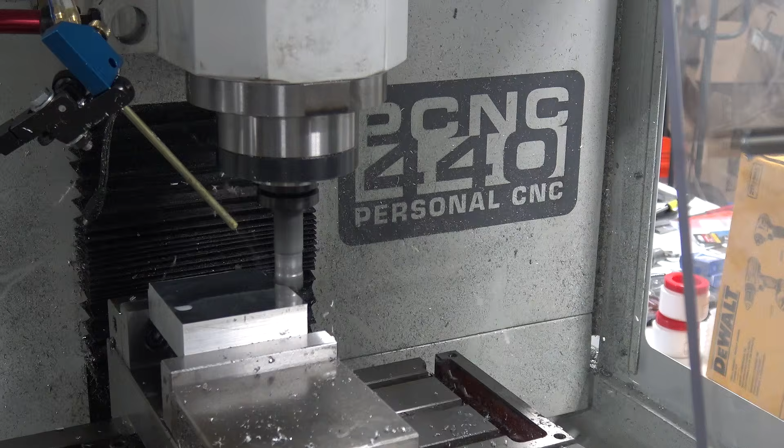Hi folks, Tormach 440, Fusion 360. Let's try machining a DIY injection mold. Welcome to another Wednesday widget. I'm super excited for this.

So Peyton over at X39 Brick Customs sent this over to us, and he said, do you think this is something we could make on a 440? I think he was trying to decide if that would be a good machine for him. And I don't really know, I mean, I'm inclined to say yes, but I've never made an injection mold like this, but it seems so cool.

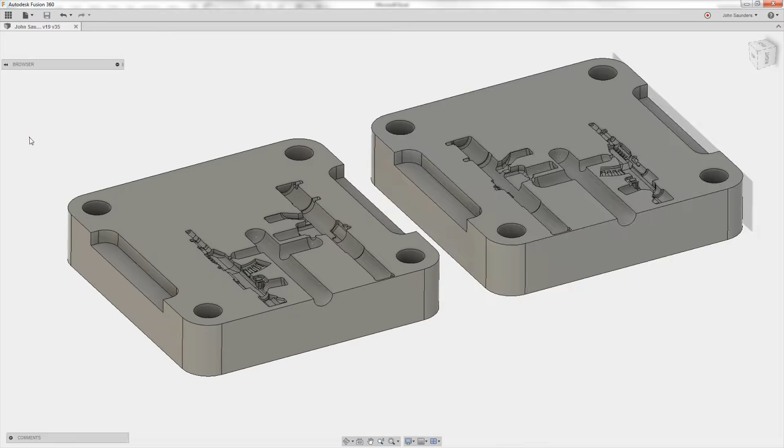So I'm going to hop back into CAM, and I broke the CAM up into a few different sections. The first is called roughing it. So that's where we're going to handle facing it off, the adaptive around it, because our stock is a little bit bigger than the OD of the mold. Contouring, this is basic stuff, drilling, and then we are going to rough out and pencil out the, I don't know mold terms, flow slots where the injection mold material gets pushed in.

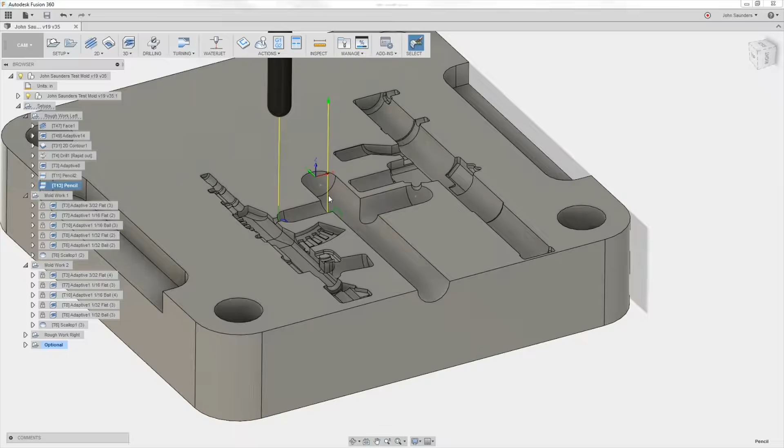So it'll actually get pushed in under pressure through here, and then the two little slots, one is right here and one is right here, are what allow the material to flow into the mold. But that's the quick and dirty stuff. Then we're going to focus on the left side. And again, I'm being pretty conservative, I think.

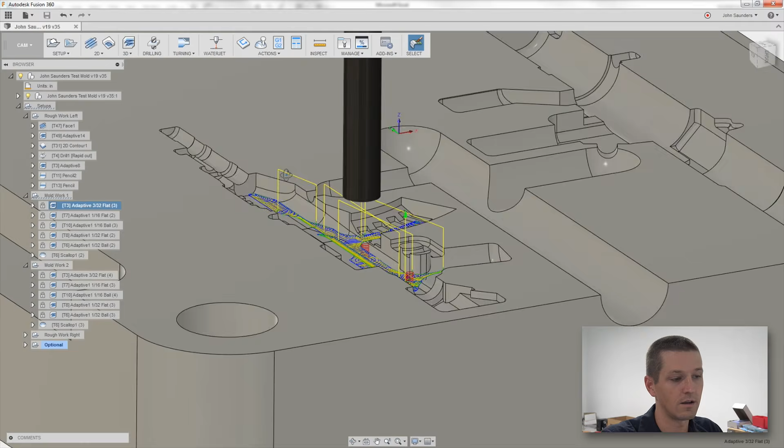We're going to start with the 3/32 end mill, which is huge and funny compared to the ones we're about to use. A 1/16 flat, 1/16 ball, because that ball end mill is going to be able to get into a lot of areas that the 1/16 flat can't get. And then the idea here is basically to get rid of the material with as strong a tool as possible until we get down to these last two, which are 1/32.

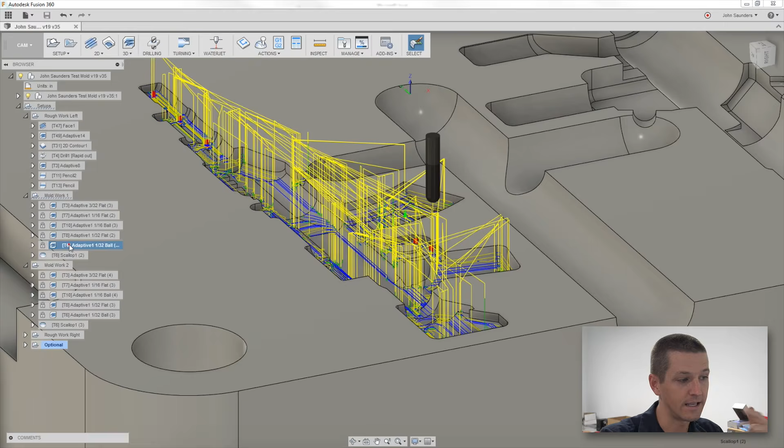Again, I'm going to do a flat, then a ball, and then finally we're going to do a scallop. And the scallop is going to be what cuts all of the final geometry. So all of these above here have some amount of stock to leave. So the idea is, again, that you're using this last tool to cut everything in one sort of pass. Hopefully it looks good. Hopefully it meets their expectations. Hopefully it makes a good part. Shear hog time.

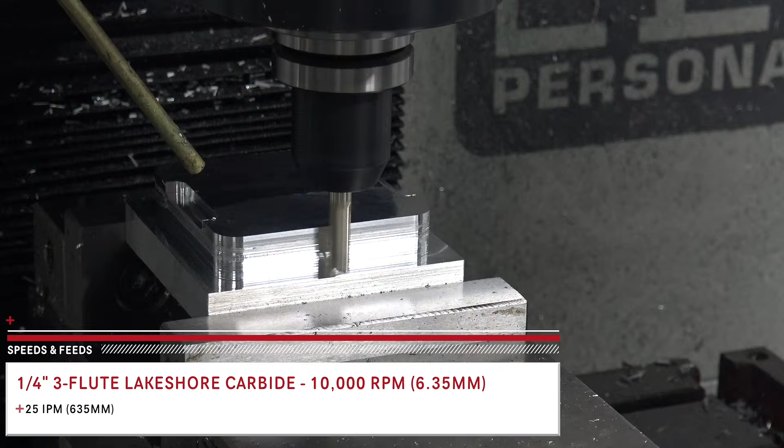I should have run the shear hog down 10 or 20 thou lower. That way this finish tool here was only cutting on the side and not on the bottom. You can see it's leaving a little trough here. Not a huge deal, but it's better to do it right, and that would have been an easy fix. So you guys do that.

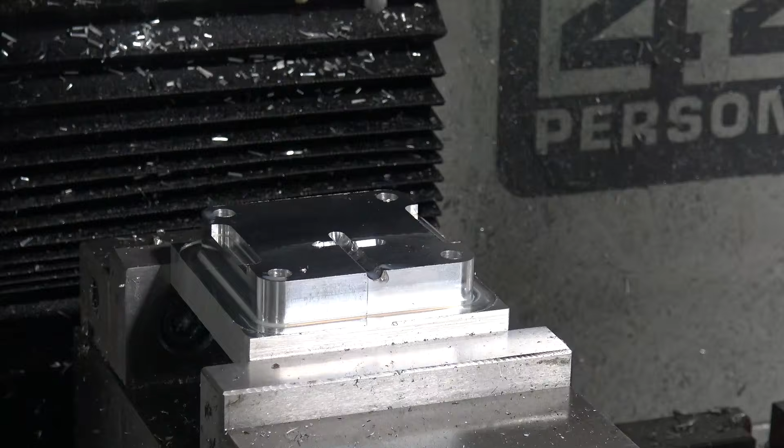Pencil toolpath, 3/16 ball end mill, where the hot plastic will flow to get into the mold. Let's throw a quick chamfer on this as well.

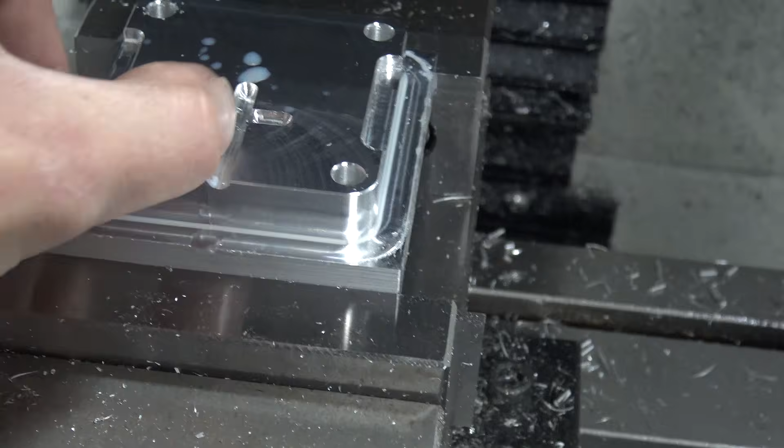So I'm not happy with the surface finish on the penciled slot there. And I have to think that that's important because the smoother that is, the less friction there'll be, and the better that the injection molded material will flow, which is really important because it's got to push down here, out the sides, and into the mold die. So, you know, this is the time to put our A game on.

So I'm going to run the same operation again with that same tool with just a negative 0.001 stock to leave axially. So it's just basically going to run over the same exact toolpath. And let's just see if that cleans it up. If it doesn't, I got another idea.

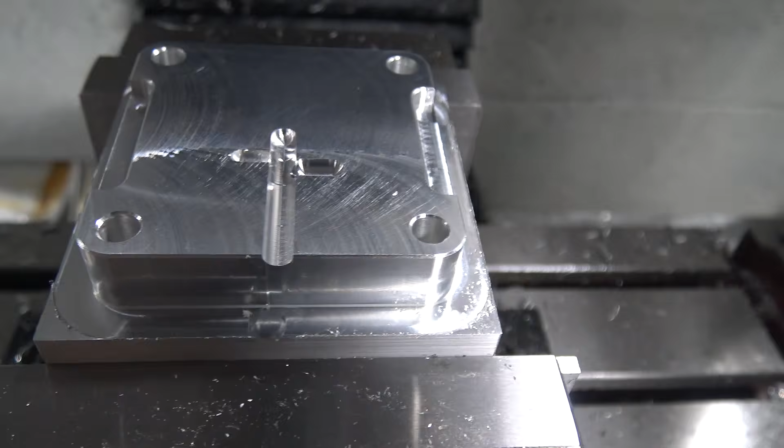Okay, that actually did help. I'm concerned that the camera makes it look worse than it is. And I'll admit, I think it could be better, but it's not chowdered up or chattered like I thought it might be. Customer says, you know, hey, that needs to be even better next time.

What I would have done was used a smaller tool instead of the full diameter and done a step over pass, basically like how we're going to make the mold. That way you don't have this issue where you've got 100% tool engagement and you're effectively both climb and conventional milling at the same time. So you're putting more pressure on the tool, more deflection, more difficult chip evacuation, and so forth.

Although, hey, look at that. I love that. All right, now comes the real part. Here's our setup for this job. This makes me so happy. It's like such a stress reliever because we've got our bins. I got my tool in it. It's quick and dirty, tore off a piece of paper with the tool number on it.

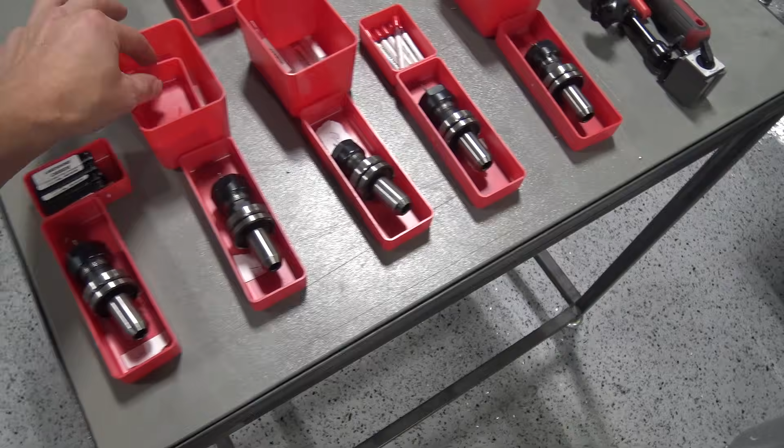And then I got the extra tools right here because these are really small tools. I'm not used to working with 1/32 end mills. You can barely see the damn thing. That's 30 thousandths. I think we're probably gonna break some tools. So I've got the tools to measure my tool runout, my Haimer, my tool set gauge, and just nice and easy.

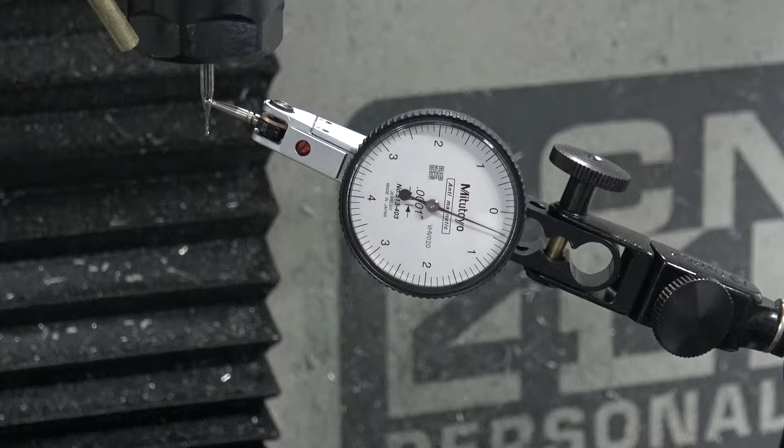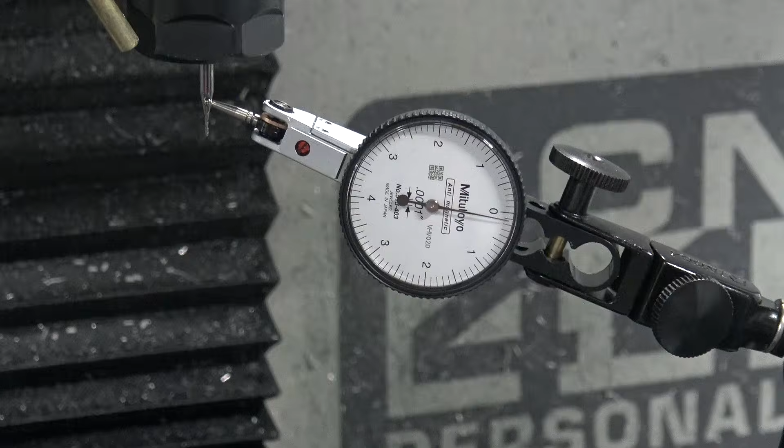Tool runout. So this is the 1/32 flat end mill. When I put it in and turned the dial, it was running out about 7/10. So I went to the high spot, just like we did in the video last week, and punched it with the screwdriver and the hammer, and it's now at 4/10, which I'm told is within the acceptable range. Less is better, but 4/10. Here's the real question. Let's run this op, and then let's measure this when we're done and see if it bumped back. My God, it's tiny.

I haven't broken the tool yet. That's good. And that's adapting. So that's the beauty of it. This is why I love Fusion 360. I really do. And so these adaptive tool paths are awesome.

I think we talked about this when we made that oil mold for the motorcycle, because it means I'm not going to break this tool, or much less likely to break this tool, because I'm taking constant chip load cuts. So it's not going to dive into a corner, dive into a bunch of material, increase the tool engagement angle, and it's just awesome.

We can, quote unquote, hog out with these progressive adaptives, and then finally use a scallop toolpath. It's a beautiful 3D toolpath. I'm really excited to see what it does. Okay, good, we didn't break a tool. So far I've only broken the biggest tool, the 1/8 inch tool. I'm really curious to see what this is gonna read though. Really curious.

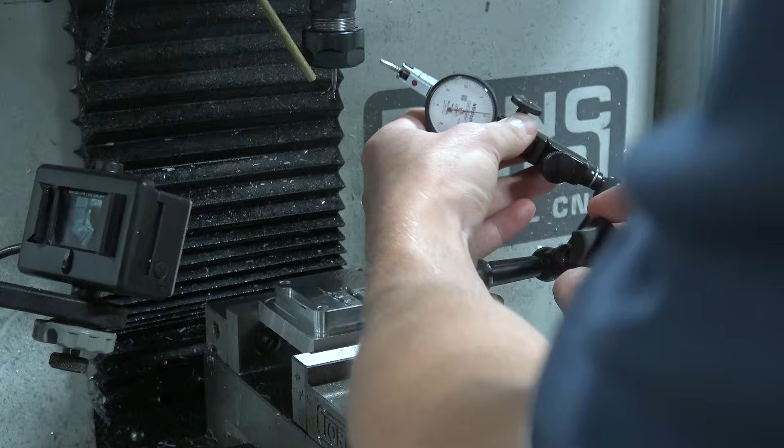The Noga with the finger adjustment in the base is so much freaking better. This is Amazon, not even that expensive. I love it. Okay, here's the big moment.

So I told you we were at, well, let me adjust it back to 0. It's almost like there's some slop in the indicator. Clearly it moved. That's getting to 5. So we bumped it to 4. It was at 7/10 originally, so it stayed closer to the position where I bumped it, which is good.

I threw in the 1/32 ball. It was about 7/10 as well, and I bumped it down to, right now it's at 2/10. So this is going to be an even better test. Let's see what this one's like when it's done.

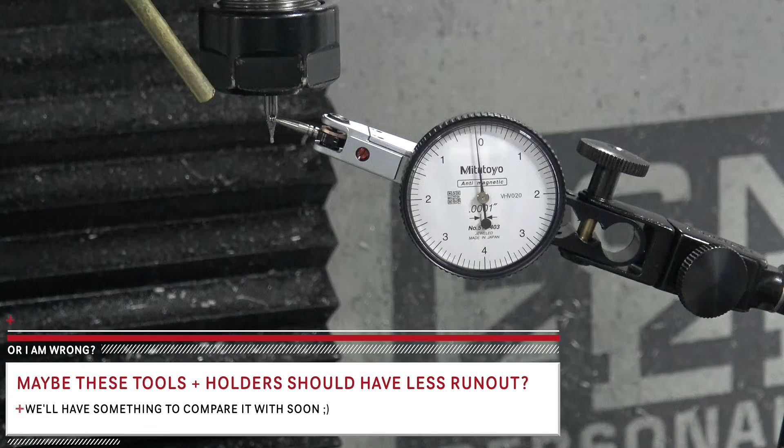We're done. We didn't break the tool. Let's check that runout. Is it just me, or is this also super exciting to you guys? Like this idea of just dialing in tenths on tools and getting these really, really good tool paths, and the idea of just using a $5,000 base price machine, or 10 loaded, to do this kind of work.

Hey, well, it's jumpy. Why does it do that? We're getting some error. Let me find another spot, maybe. Wow, talk about an idiot moment. The chips. Good grief, John. It's acting differently. Why is it doing those little hoppy hops right there? Am I touching? Oh, I'm starting to, okay. One last freaking time here.

Can someone explain this to me? It's acting like there's no runout, and then all of a sudden it'll do that little jerk. What was that? Is that just a chip? It might just be a chip. It looks like it held though. Here she is.

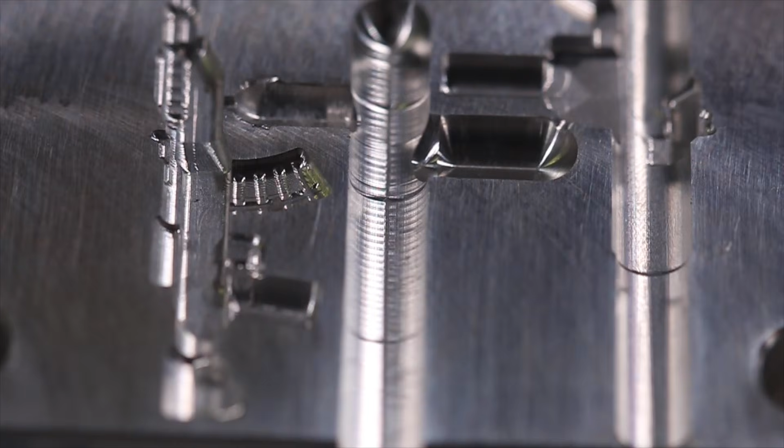First of all, you can see the mirror reflection. The Superfly remains an awesome tool, but I'm really happy. You know, I'm not a mold maker. I've never done this before. I don't know if I've ever used a 1/32nd end mill before, and I just love it. The fact that we get these tool paths out of Fusion, and it's so affordable, and this machine is so relatively low cost, and look what it's making. Look at this.

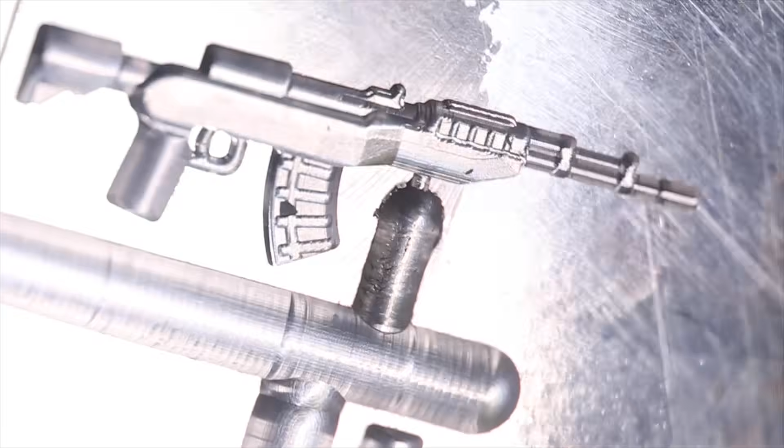Now, what I think of its looks doesn't matter. It's going to be a question of what the customer can do in terms of making their mold out of it. So we're going to find out. We're going to machine the other half. We'll send it off to them, and the proof is in the pudding. But for my first time, I'm pretty darn happy. It just looks cool. I'm sure we're leaving time on the table. Like I mentioned, we can do a better job, but this is freaking awesome.

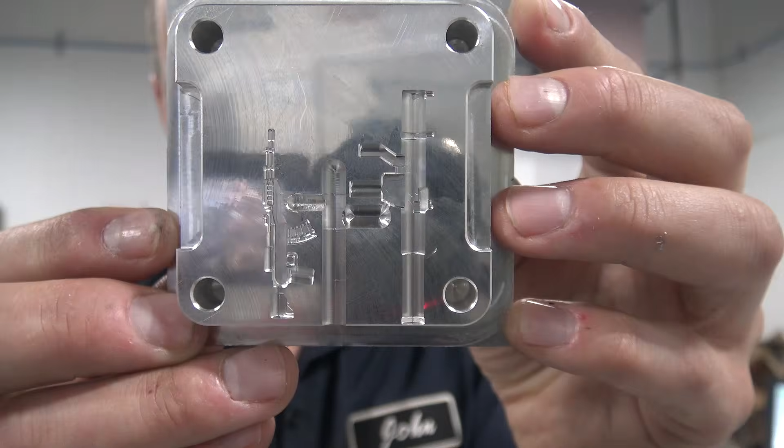So I'll ask Peyton if maybe he can do any filming when he throws it, or just show what happens in his shop with how he runs and makes this.

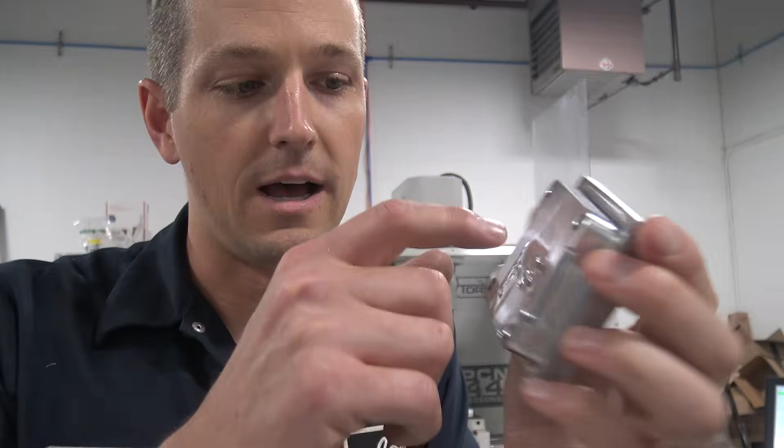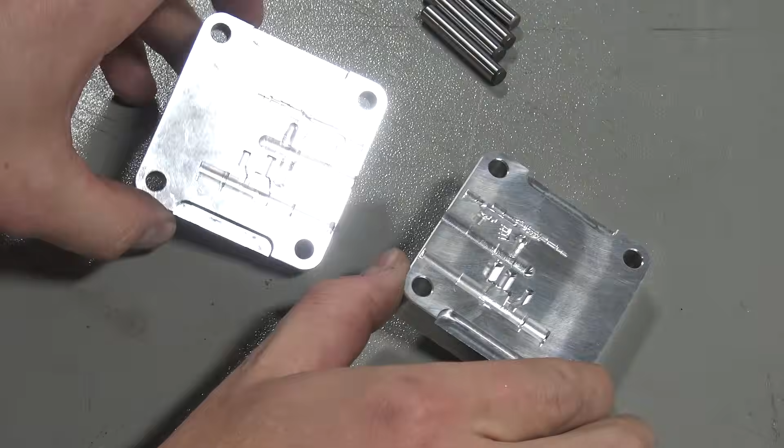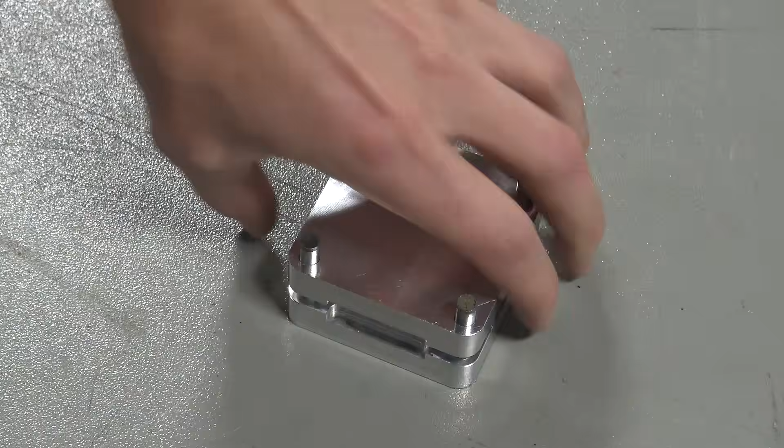Check it out. 2 sides are done now. Throw some pins in. I have no idea if this is how he does it, by the way, but I assume that there's some sort of a guide pin or dowel pin like this. And let's see here. That would be the other half. And together she gets clamped. Boom.